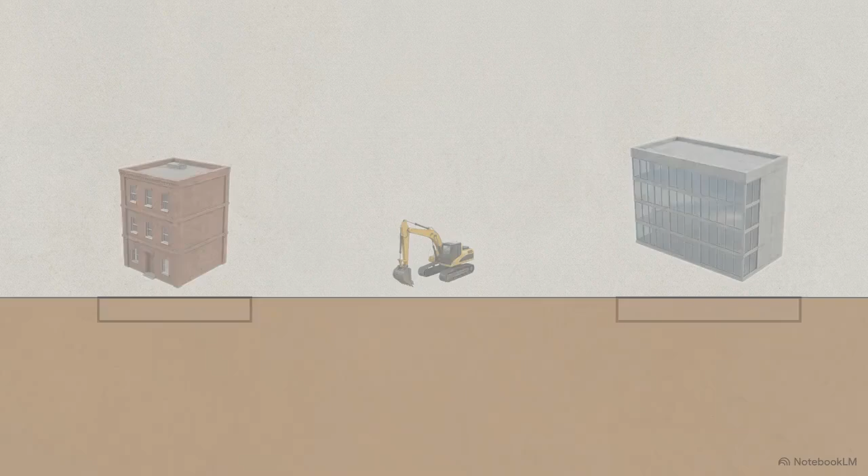When you look at a dense modern city, the biggest problem facing civil engineers is obvious. There is zero extra space. If you want to build a towering new skyscraper here, the traditional bottom-up method is a massive liability. Digging a cavernous hole right next to existing buildings threatens their foundations, and it takes months of excavation before you can even begin pouring the actual structure.

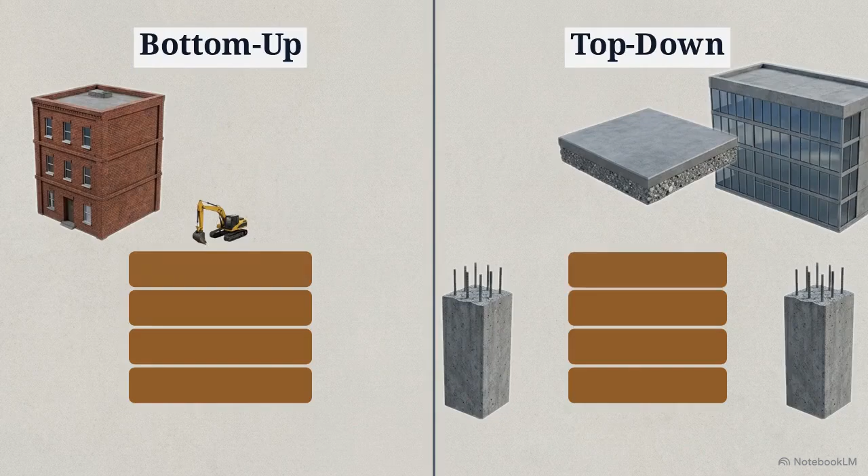The solution to this spatial gridlock is a counterintuitive engineering technique. Instead of starting at the bottom, you build the roof before you dig the hole. This is top-down construction. By reversing the traditional timeline, crews can secure the site perimeter immediately and cut the overall project duration in half. It is the exact technique that makes these deep urban basements possible in the tightest spaces on Earth. To see how this works, we start at ground zero.

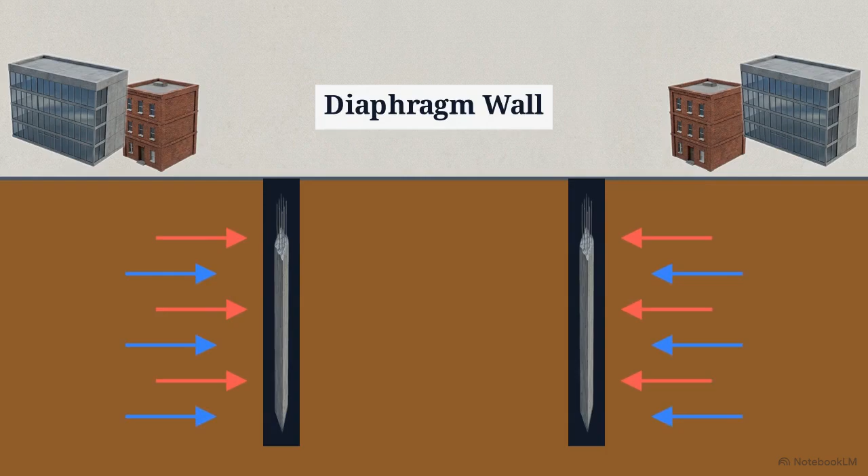The immediate objective is complete isolation. We have to cut the underground construction site off from the surrounding city infrastructure. Step 1 is the diaphragm wall. In this 3D cross-section, teams dig a deep trench along the entire boundary, filling it with reinforced concrete. The surrounding earth and groundwater are constantly pushing inward. This wall physically blocks that immense pressure.

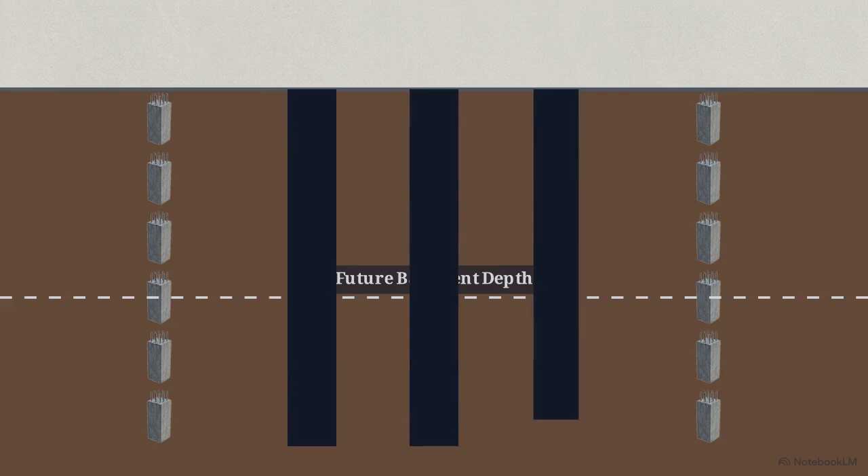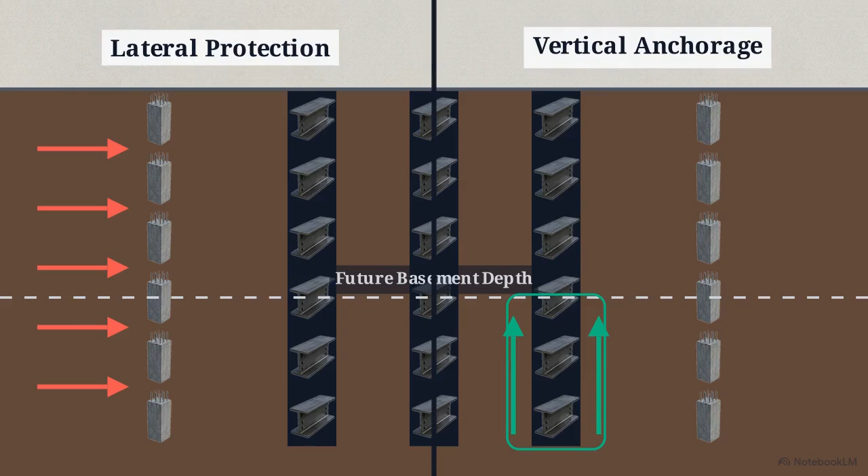But that creates a new engineering challenge. How do you support the heavy weight of a future building if you haven't dug a traditional foundation yet? Step 2 solves this. Crews drill deep vertical boreholes inside that perimeter, well below the future basement depths. Then they lower heavy steel plunge columns straight down into those holes. The site is now barricaded from the outside pressure and anchored deep on the inside. And because it all happens underground, from street level, it looks like nothing has even started.

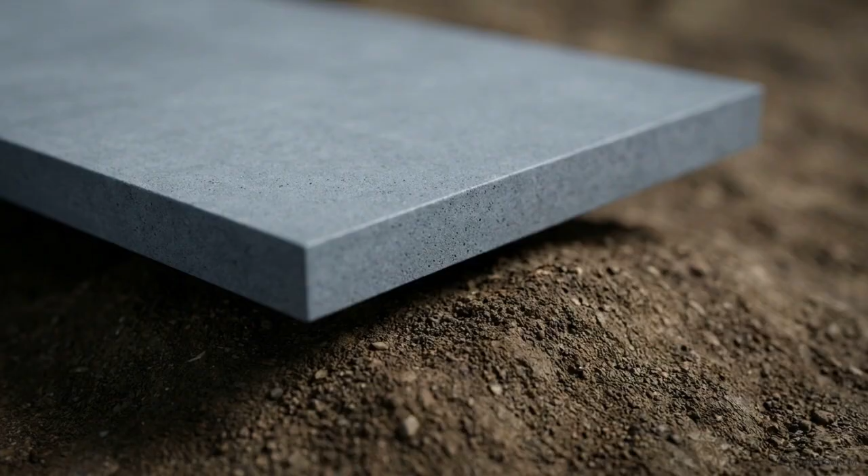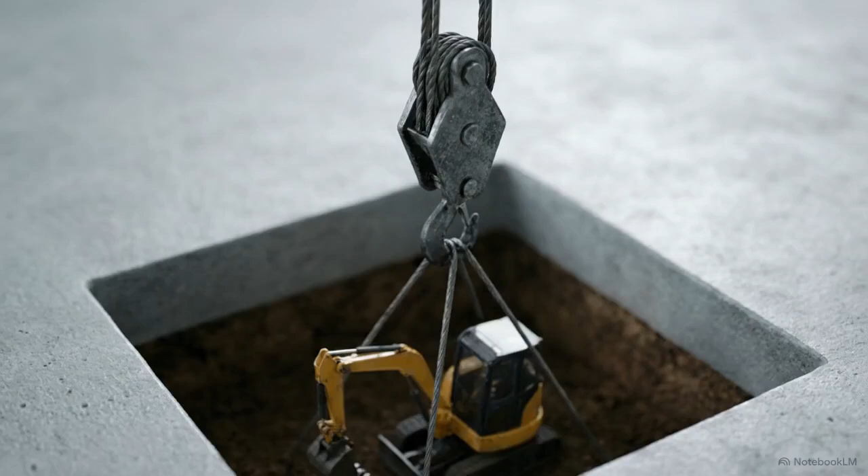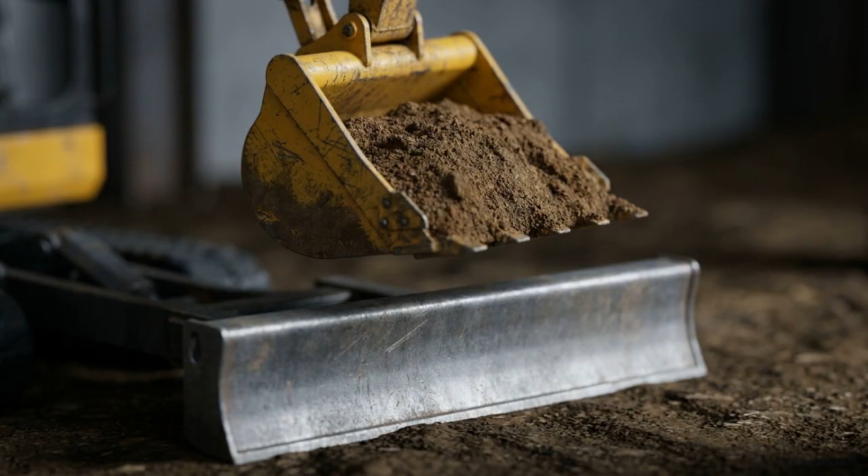This initiates step 4, the downward descent. Surface cranes carefully lower specialized, compact excavators straight down through those openings. Operating entirely enclosed under the new concrete canopy, these machines scrape out the earth and load it into skips, which are then hoisted back up to the surface through the shafts.

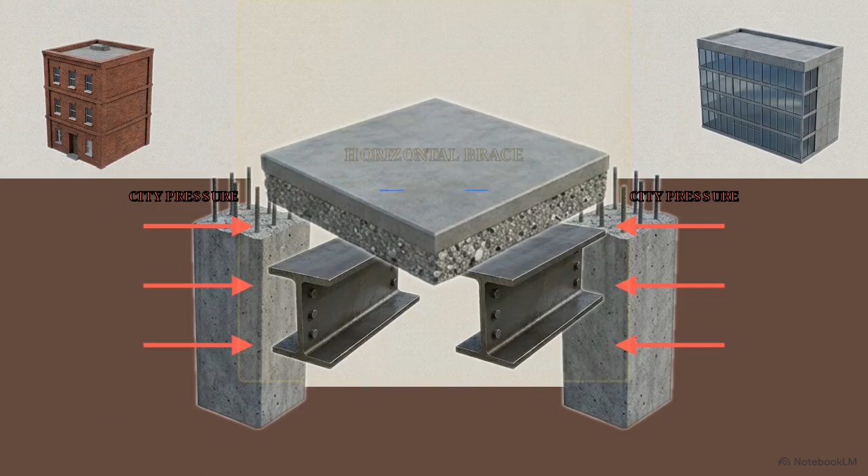As the dirt is removed, that concrete ground slab performs a vital secondary function. It acts as a massive horizontal brace. It locks the top of the diaphragm walls in place, preventing them from buckling inward under the city's pressure. The ground floor operates as a dual-purpose shield. It provides necessary structural bracing below, while offering a flat, stable staging ground above to start the real mechanics of the top-down method.

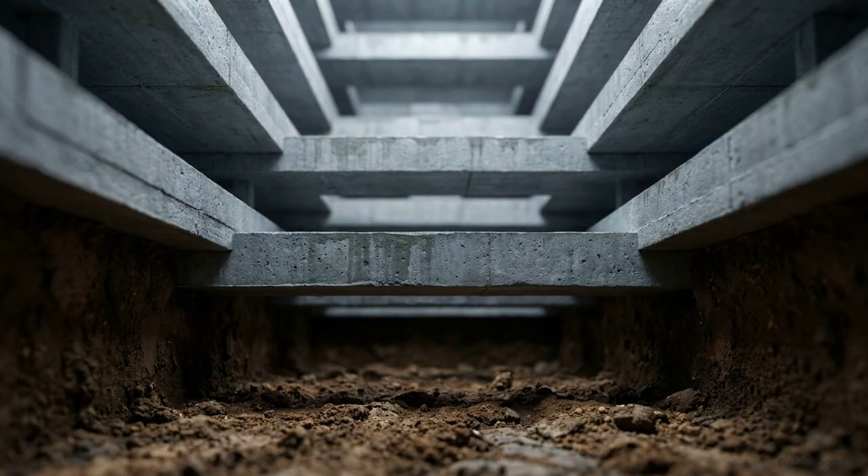Now we arrive at the primary operational advantage. We get to do two things at exactly the same time. Step 5, simultaneous construction. As excavators reach the first basement, above-ground crews erect the superstructure. A new slab is cast below, locking plunge columns into place. The cycle fast-forwards, digging deeper and casting successive basements, while above-ground teams simultaneously build multiple floors upward. Eventually, the downward excavation reaches its final depth, the lowest subterranean level.

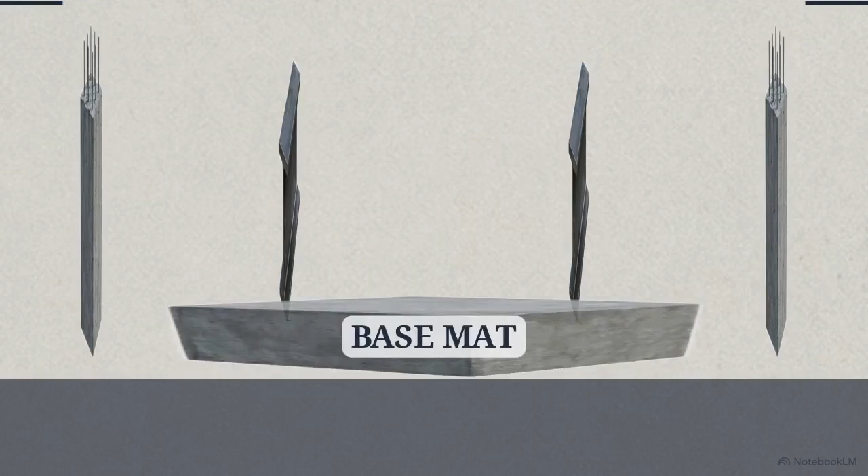Step 6 is pouring the base mat, also known as a raft foundation. This is a massive, incredibly thick layer of concrete at the very bottom of the pit. Those steel plunge columns are completely encased into this base mat. The entire weight of the skyscraper towering above is sent straight down the columns, into the mat, and safely transferred into the earth. The top and bottom halves, constructed independent of one another, are now merged into a single monolithic powerhouse.

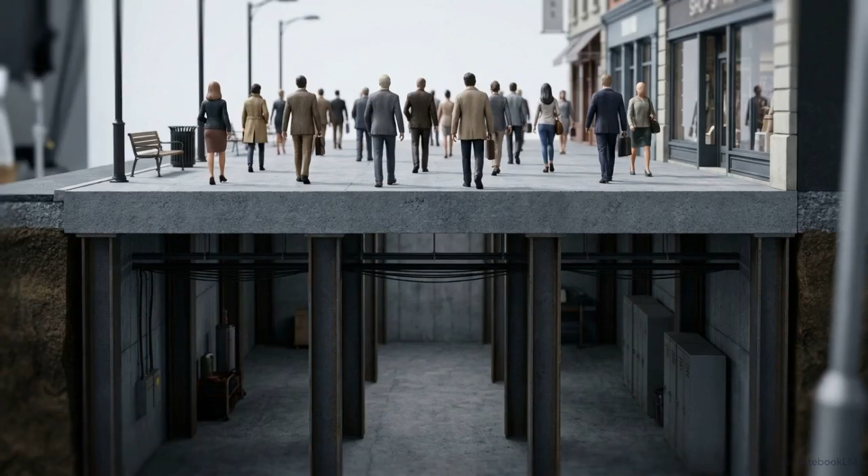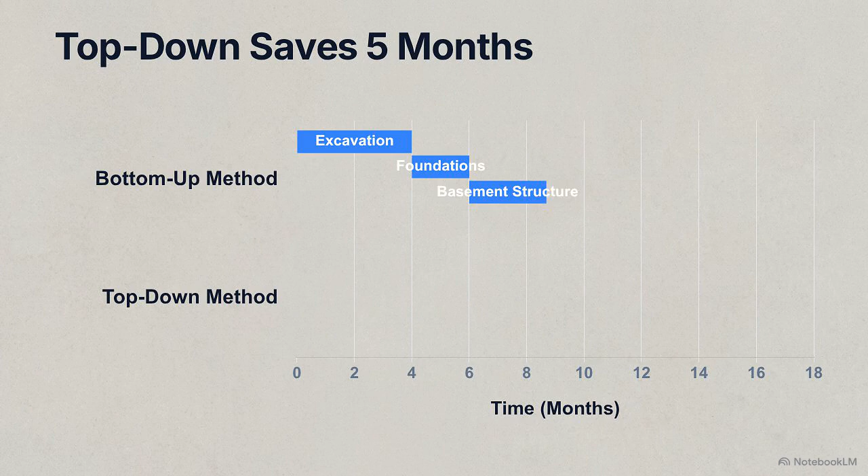Looking at the completed structure, it is entirely seamless. The everyday public walking by on the sidewalk has no idea a massive multi-level fortress was built right beneath their feet. This Gantt chart shows exactly how much time is saved. The top bar shows the long, sequential phases of bottom-up construction. The bottom bar shows the overlapping phases of the top-down method, condensing the schedule and saving months of waiting.

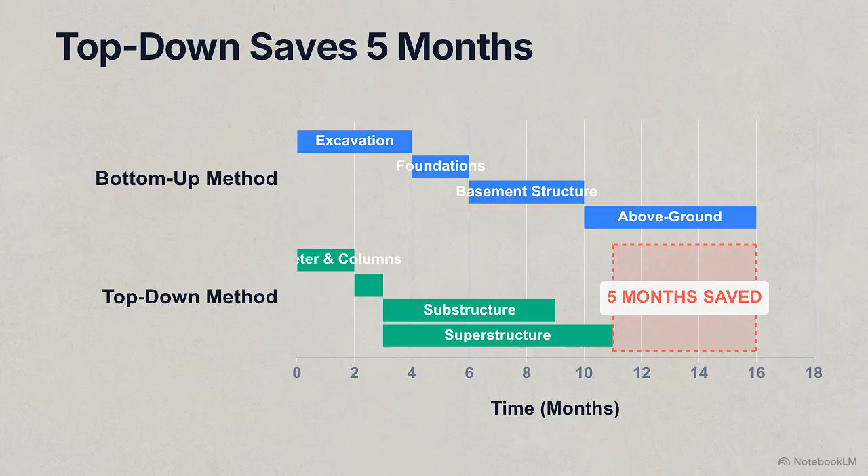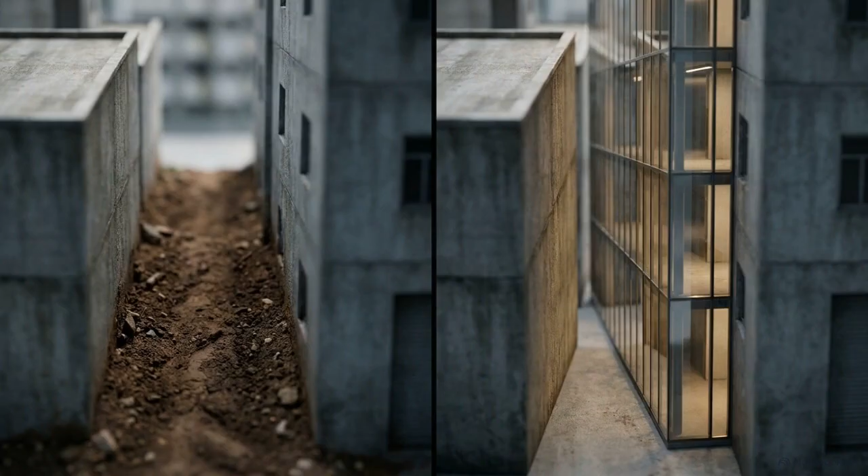In high-value urban real estate, saving 5 months of construction time means massive reductions in financing costs, while minimizing the collapse risk to adjacent properties. Modern engineering consistently turns extreme spatial constraints into timeline advantages.